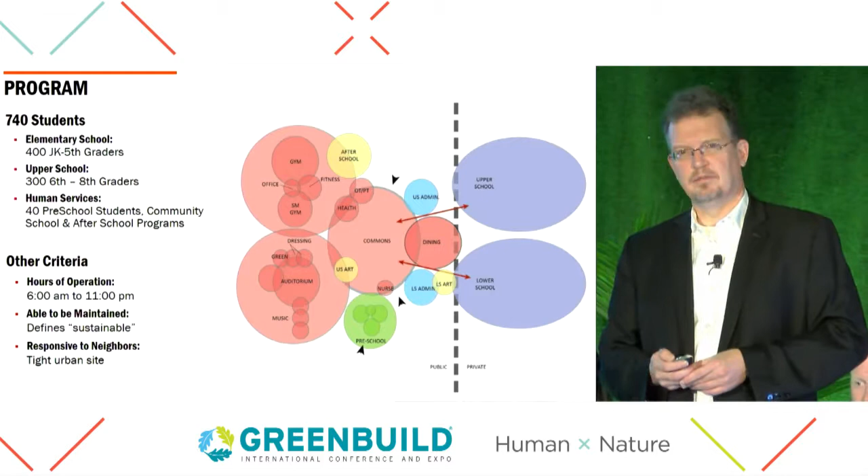And just a little bit on this project. It's in Cambridge, Massachusetts, and it's actually 3 schools on one very tiny site. So there's a preschool, an elementary school and a middle school. They call them lower and upper schools. But it's also a community school in every sense of the word, so it operates throughout the day from 6 a.m. late into the night at 11 p.m. So a very actively used community resource. So I'm starting to demonstrate the power of the place, but also giving us the opportunity to explore all these disparate issues.

It also allowed us, because it was a new building, to explore the performance of the existing buildings that these schools had occupied prior to moving into the new building. Not going to go into great detail, but because we had an elementary school and a middle school, they were in different buildings before they consolidated onto the new campus. So you can see the architecture: one's from the 70s, one's from the 30s, so different in several manners, but we'll talk a little bit about their performance.

But again, the new building had many goals, but one of them, of course, is this idea of high-performance school design. And the greatest demonstration of that, I think, is the photo on the right, in many ways, where the environment is radically different than you saw in those older buildings, perhaps, and some of the best day-lit classrooms that we've done to date. But the other factor here as well, again, is this idea of community.

So, certainly the school is drawing the community in, with their children, but it also is used after hours by the community, but also recognizing that community has another factor, that we're trying to foster a professional work environment for the teachers here as well.

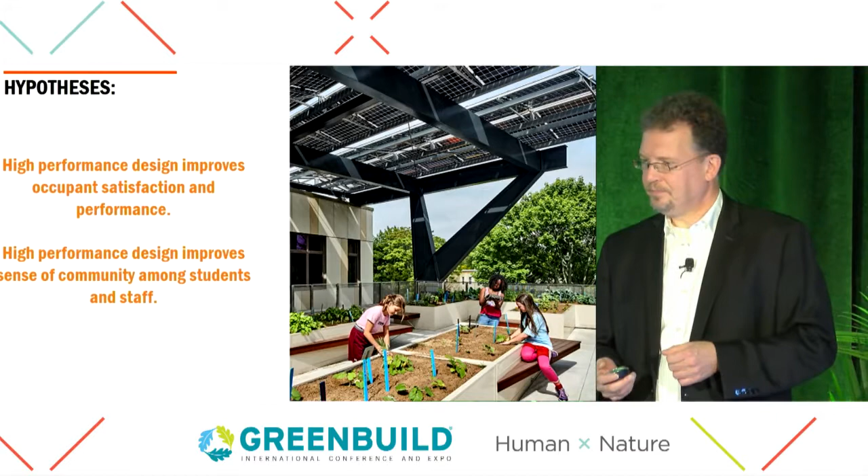So we started to put together a new version of our pre- and post-occupancy evaluation process, partly because we had enhanced our team. Katie had joined us, and some of her colleagues at that point, giving us a greater set of expertise, particularly from the sustainable design side, so we could start to build a process that was both qualitative and quantitative. But we realized that there's a lot to focus on, and so we had to narrow the scope.

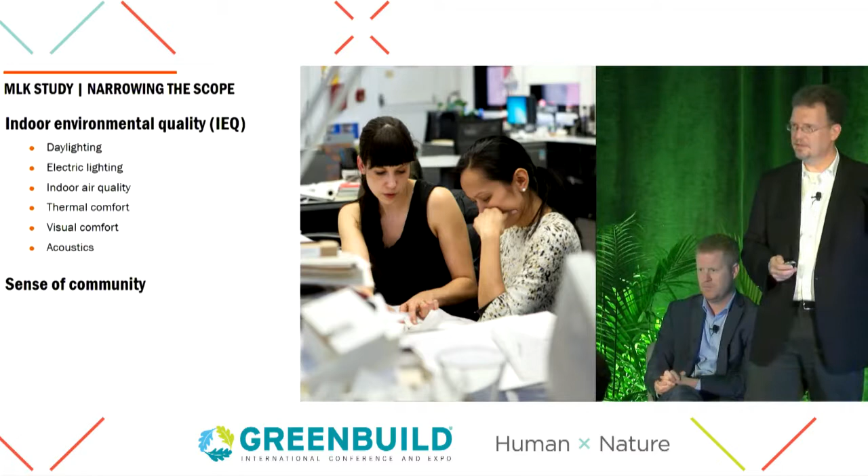And so we started to focus and drill down on this idea of indoor environmental quality, which has a number of facets that we could explore. These were the ones that we defined for this particular study, so everything from daylighting to acoustics.

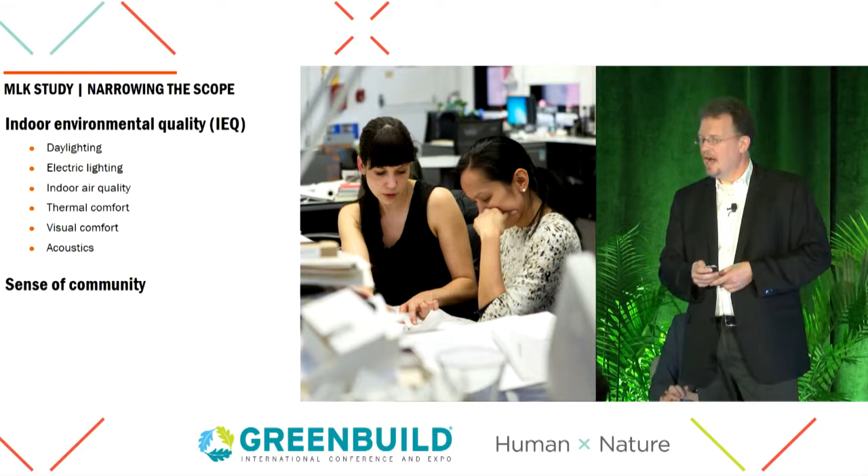But we could also explore that sense of community here as well at a number of different scales, because we could study the individual school's sense of community, we could study how each school cohabitates on the site, and then we could also talk about how the school impacts the community at large.

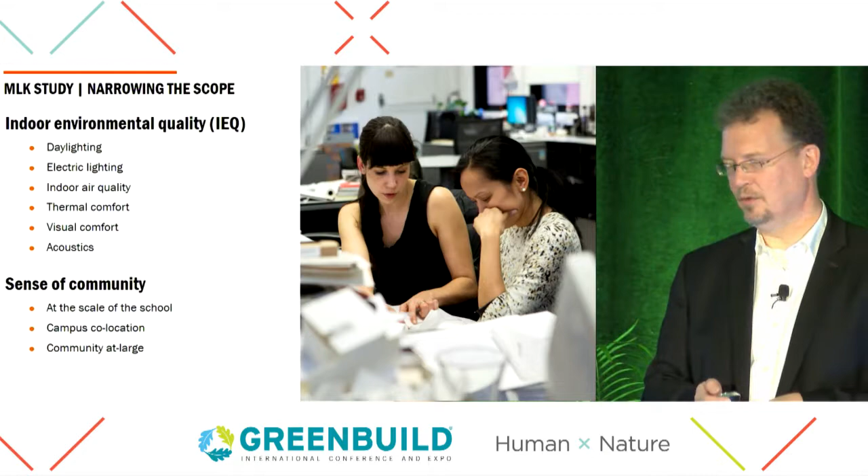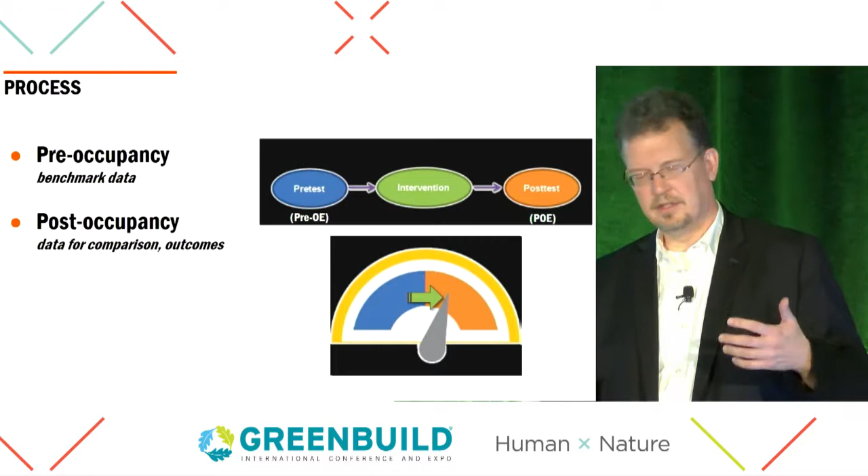And with that, we started to build a process, and I think this is the first time that we did this, the pre-occupancy part. Post-occupancy has been talked about since the 60s, but the important piece is that you need a benchmark, to really see if you've moved the lever right in design. So we studied those prior facilities and how people were engaging with those facilities, and then the new building as well. But of course, we did a literature review.

The two primary inputs for us from the users and the built environment were an occupant survey, which was using SurveyMonkey, so it was online. But we've tried to tailor that, as we'll talk about in a moment, to different people that might be responding to that, and their age, their development, their access to technology.

But the other is that we could get into the environment and start measuring things. So from the IEQ metrics here, and you can see one of our colleagues here actually using some of the tools that we'll talk about in a moment. But the third leg of the stool was this idea of what educational indicators do we need to try and tap into to make this connection. And in many ways, this was the part of this process that we didn't quite get completely done.

But, of course, there's a lot of inputs from the literature review. Many of you probably know these studies, but if you don't, you should check at least these ones out as an input. Certainly the Chan School is doing incredible work on cognition and CO2, and the Clever Classrooms study from the University of Salford is sort of all encompassing on these kinds of impacts. And then everybody probably knows the daylight studies that came out of Heschong Mahone.

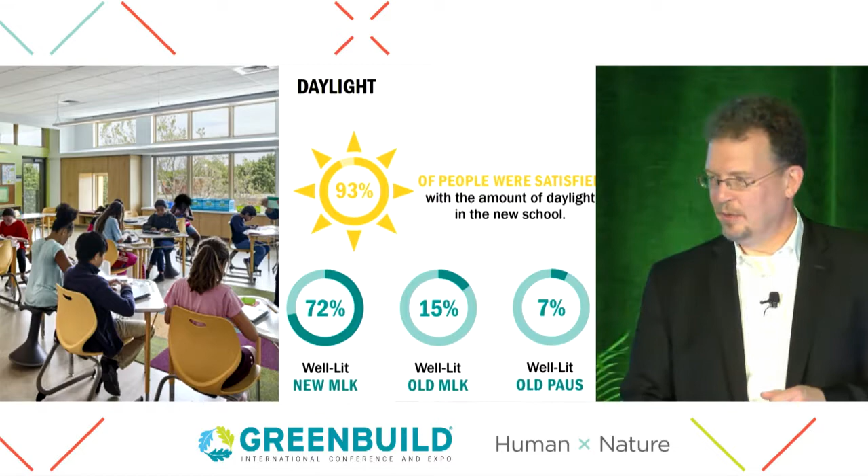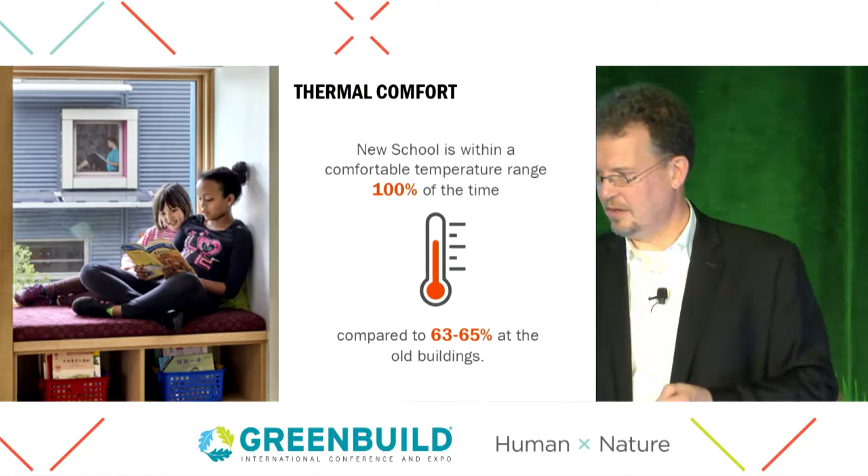So here's what we found in this first process. One, that people were really happy with the daylight in the building. That compares very positively to the older buildings, so old MLK, old PAUS, Putnam Avenue School, as you can see the demonstrated change in people's perception of daylighting in the buildings. Likewise, the buildings performing within the thermal comfort ranges, so again, thinking about how people perceive that.

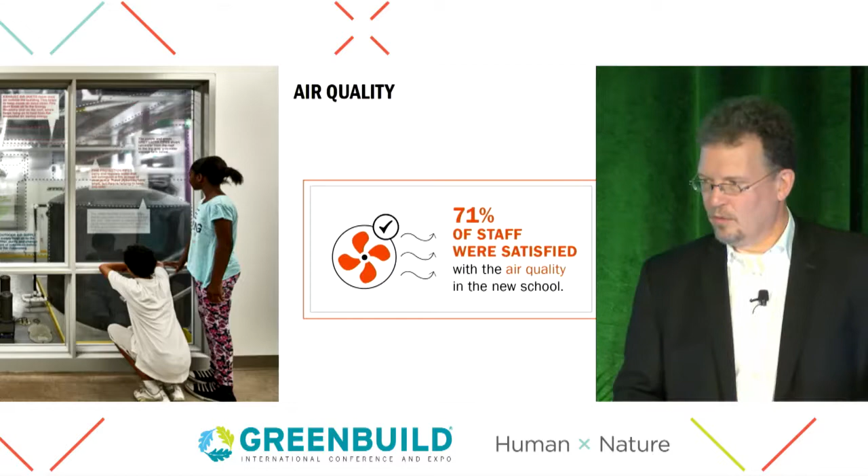And of course, one of the major inputs is acoustics in the environment. So again, another significant return and improvement from the prior facilities here. We'll talk more about acoustics in a moment as we continue to learn about the importance of this in the environment. But air quality and the general outcomes as to the feedback that we received, that, not quite universally, and

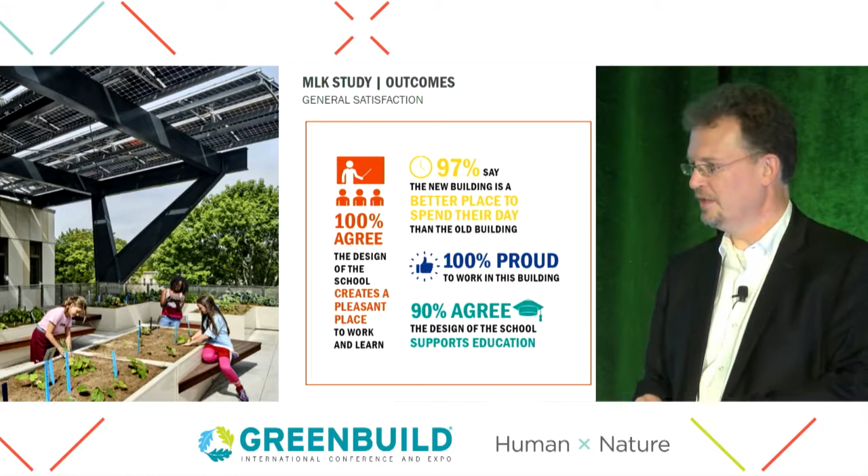my client said, I don't understand why this isn't all 100%. There's a serious case of building envy about this building across the district at this point, and everybody wants to teach in it. I think the lesson there is that probably not everybody's happy all the time, but I think it's seen as sort of a resounding positive impact, and relationship between people's perception of the environment and the design and the inputs. But with that, we continue to push this process forward, and Patrick will tell us how we've been able to do that.

So before we dig into the DC study, I want to give a quick snapshot of what the DC school system looks like and the modernization program that we have undertaken. I think when people hear DC today, you think about Fox News and CNN, but there's a lot of people that actually live in DC, and there's a lot of really beautiful kids that go to school in DC. We have 110 public schools in the district. There's about the same number of charter schools that fall under a different organizational structure, but what I oversee, there's 110 schools.

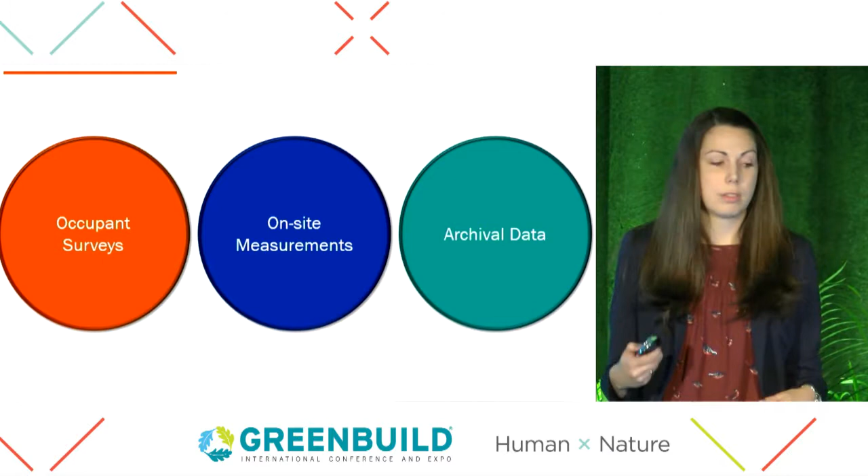So to talk about each of those pieces in a little more detail, first the surveys. The really interesting part of this process was the schools we were looking at were elementary and middle schools, so we needed to adjust our survey templates a little bit to work for those populations. For our middle school students and our older elementary students, we used some pictures in our questions to make sure they were understanding what was being asked of them. The teachers had a significantly longer survey that looked at some more factors around their school and asked more in-depth questions. So we got a little more information from that population.

And then my very favorite population was our kindergarten to 2nd grade students. We wanted to include them as well and get their opinions. So we created a 1-page worksheet that the students could fill out where they could pick one IEQ factor, tell us if it made them happy, unhappy, ready to learn, not ready to learn, healthy or unhealthy, and tell us why in 1 sentence, and then draw us a lovely picture of what they thought of their classroom and their IEQ factors. So these were my favorite results to process by far.

Next, we went into the on-site measurement portion. So we have a variety of tools at our disposal that we use to measure these IEQ factors, and I'll introduce a couple of them a little bit later for an activity we're going to do. But you can see us here using them on-site.

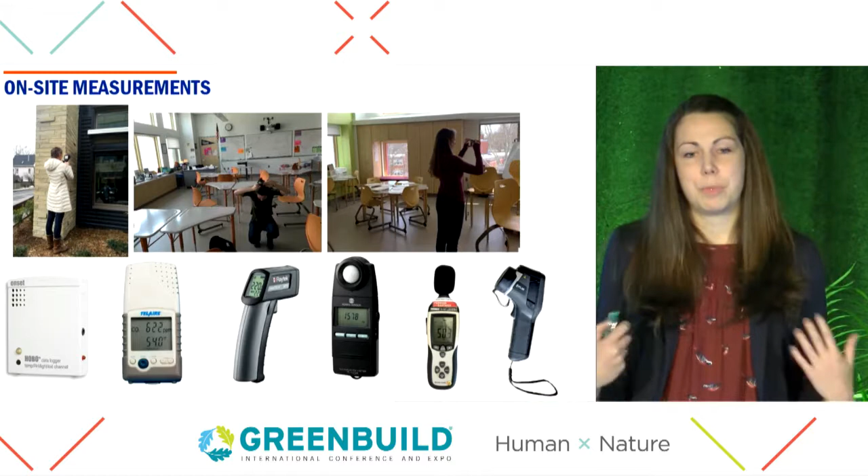We did this study over about a 5-week period last winter. So we went to 2 or 3 schools a week with a team of volunteers who were taking the measurements on-site. And then we did the daylight measurements over spring break so that we could be in the classrooms but not disruptive of the learning that was occurring.

So the measurements that we actually took came into the 4 categories of IEQ. First being daylight. We looked at both distribution throughout the space, what areas were overlit, what areas were underlit, and which areas were appropriately lit. And then also looked at glare within the space as well.

Moving on to thermal comfort, we looked at the air temperature and humidity. We did this over a period of a week so that we could observe both occupied and unoccupied conditions as well. And then we also did thermal imaging of the exterior of the building so that we could see where we were having issues with thermal bridging and heat loss on the envelope.

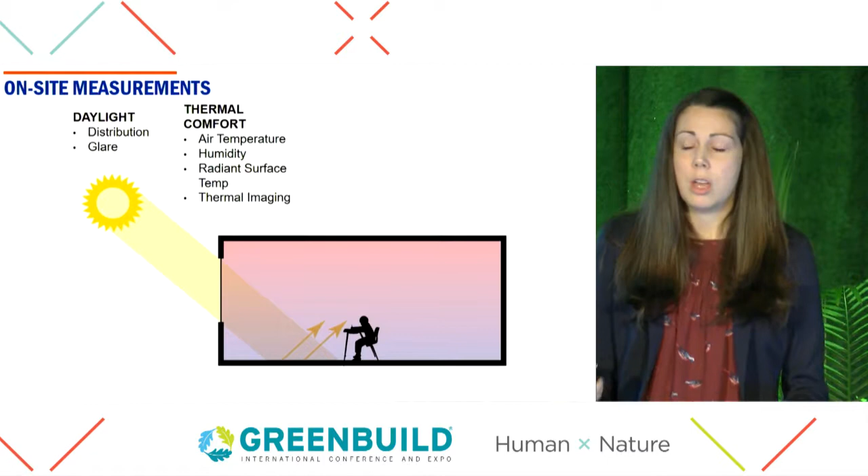Then moving on to acoustics, we looked at ambient noise within the space as well. We did this both again in the occupied and unoccupied conditions so that we could see what the background baseline level was just from the mechanical systems or noise from the street that was coming into the facility, and also when there were students in the classroom and they were doing activities, how loud it got during those conditions as well.

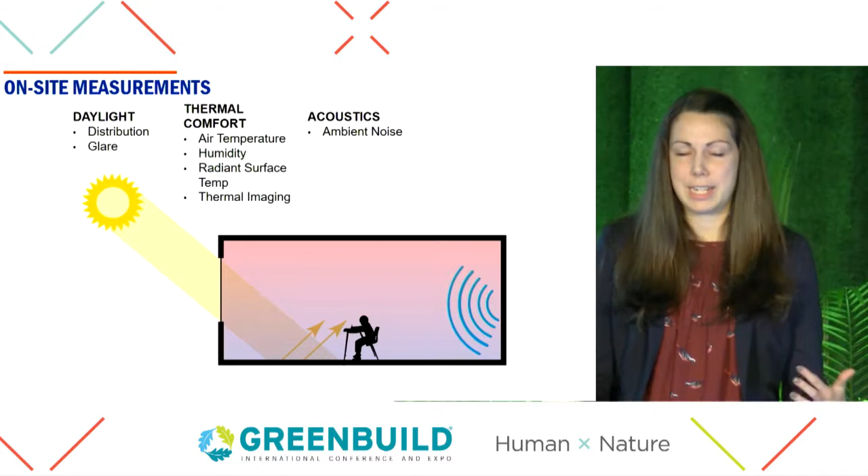And then finally, in air quality, we looked at both CO2 concentrations within the space to see how those would build up throughout the day and how the mechanical demand was keeping up with that, and then also VOCs within the space as well.

And then for archival data, using the metrics we were able to get from DCPS and other publicly available sources, we looked at student attendance rates within the school, boundary rates, which is actually a metric fairly specific to DC, so students are able to attend any DC public school they'd like to, but they do have a neighborhood school that's assigned to them, which is the closest school to their house.

So this metric is looking at the number of students who choose that neighborhood school as the school that they actually attend. So that was contrasted also with enrollment rates, just looking at how many students are attending that school. Also student nurse visits throughout the year, faculty retention, and crime incidents in the block surrounding the school.

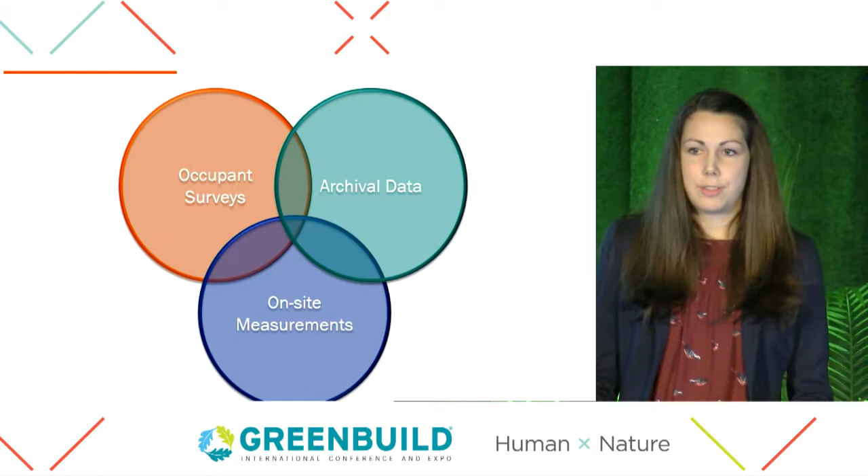But really what we were interested in doing was looking at how all of these pieces of data came together. So we actually brought a statistician onto our team to help us look at all of this data and try to identify the connections and what was causing these different issues. So we're going to get into the results of that study, but we're going to keep you in suspense for a little bit longer. We'll get to that a little later.

But for right now, we're going to move into a quick activity and demonstrate this whole process right here in this room. So we're going to use you guys as our guinea pigs of a POE of this room. All right, so the first one we're going to do, if everyone can take out their cell phone, you can actually use your cell phone. So we have, let's see, okay.

So what we're going to ask you to do is, how have you found the acoustics to be in this room? So what you're going to do is you're going to text one of these codes, for which one you identify with, to the number 22333. We'll be able to see. We hope. Well, that's good. Yeah.

Interesting. For folks who are dissatisfied, can you raise your hand? I want to see where you were in the room. But in general, it seems like the acoustics seem pretty good in here, and they seem good up here.

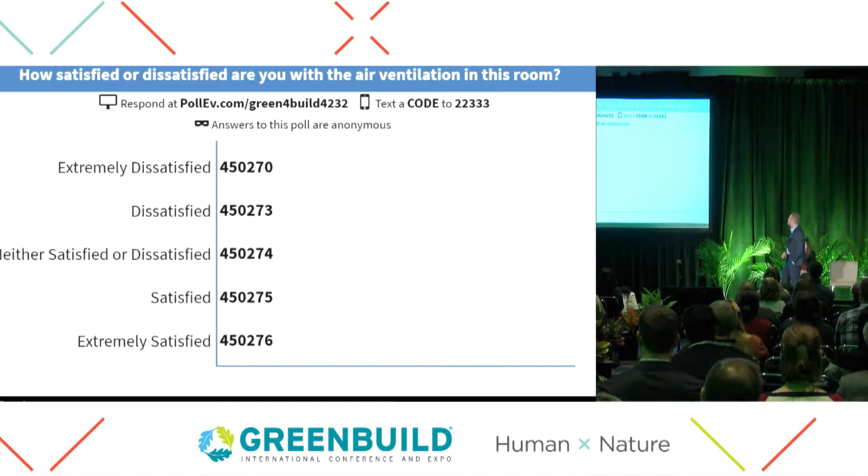So the next one we want you to think about is air ventilation. How do you feel in the room? Do you feel there's enough circulation of air? So again, text the codes on the left on the chart here to the same number.

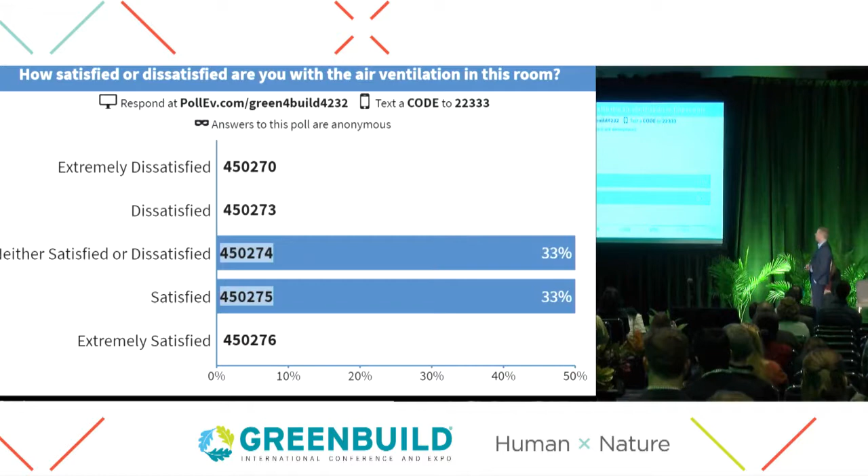Not quite as good as the acoustics. No one's ever extremely dissatisfied. Yeah, right. Or extremely satisfied here. Not an extreme group. Yeah. Very neutral. All right.

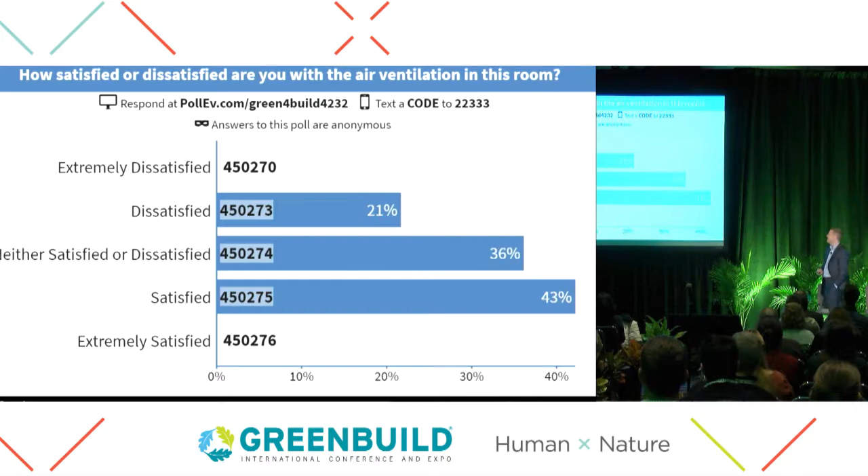So the next one you want to think about is temperature. It's obviously cold outside, and I was telling Sean and Katie, I hate winter conferences. You got to lug around your winter jacket too, but I would agree with the dissatisfied. These lights are intense.

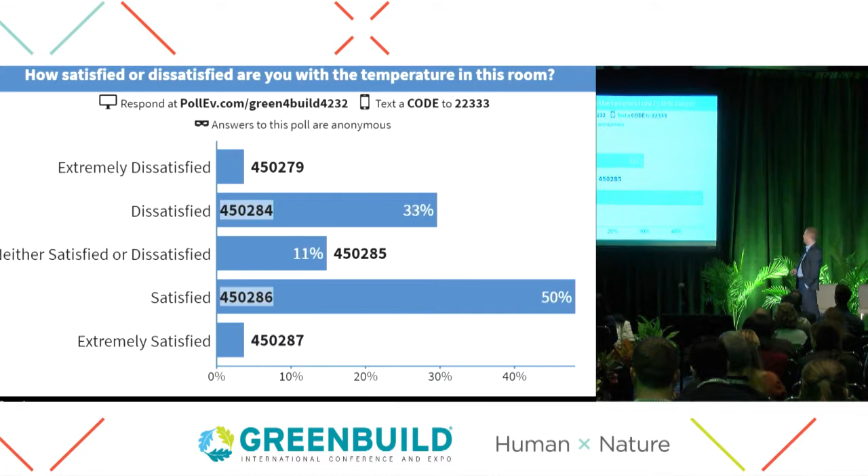Interesting. Definitely more of a distribution here. So this is just an example of what we put the students and the staff through. Obviously, a lot more detailed questions than what we're doing here, but this is an example of how everyone's a little different, especially in this temperature one, and everyone's got different body temperatures and what feels good. So interesting results.

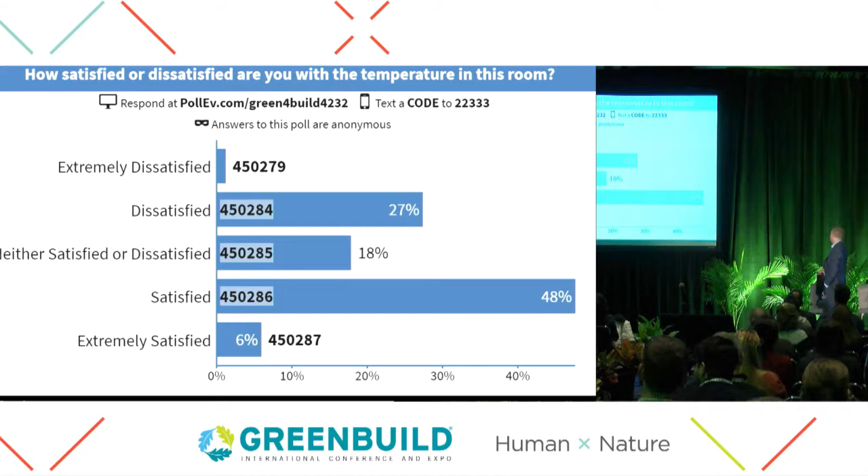All right. So we'll move on to our IEQ metric actual on-site measurements. I have been collecting measurements the whole time. You guys had no idea. So this is my sound meter. It's been sitting up here up front the whole time. So we will actually get a reading of how the acoustics are doing within this space. We always have to explain this one when we take it to schools or offices. It's not actually recording what you're saying. It's just recording how loud you're saying it.

So it will log data over time. I have it set right now to take a data point every 45 seconds. So I'm going to get my lovely colleagues to download this data real fast, and at the very end, we'll be able to see how the acoustics actually performed in this space.

And then my other tool that we've been using is a Hobo CO2 monitor. So it's collecting temperature, humidity, and CO2 concentrations and has been logging every 5 minutes while we've been in this room as well. So we'll download this data real fast, and we will see how this room is actually performing and be able to compare that with your guys' satisfaction. And then our last piece, Sean.

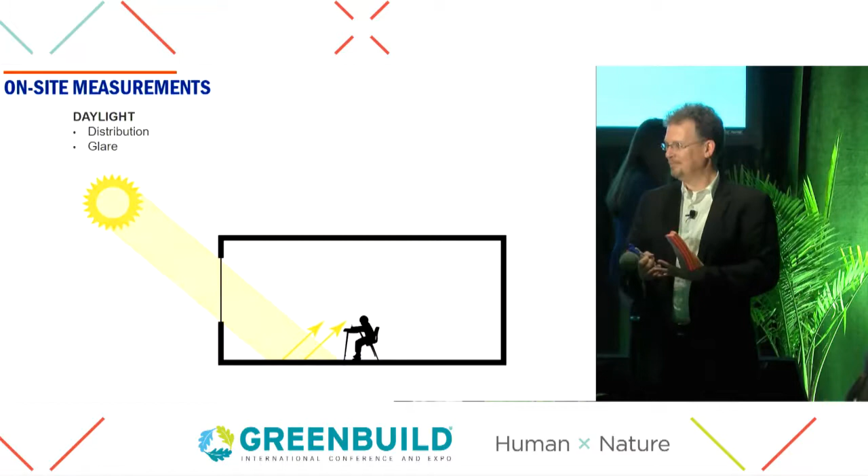So the final piece, and I think the most fun piece, of course, is the drawing exercise. Well, okay. So you saw the example that the children did before. What I'd like for you to do, and as many of you are architects, hopefully you'll be interested in drawing for us. But those that are interested, raise your hand, and what I'd like to do is just take 2 minutes and do a sketch on one of these indoor environmental quality factors, so acoustics, thermal comfort, daylight, whatever you like, and just do a quick sketch, stick it on the wall if you like.

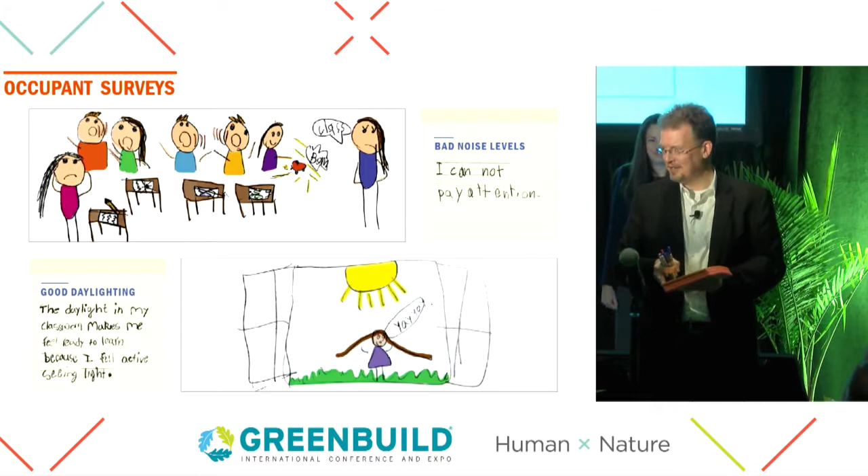We can actually make a gallery here amongst the fronds, and again, we'll have the opportunity to compete with some of the kindergarten students here. There's a marker here if you like as well. So, anybody else? Come on, there's got to be more. So, go for it. Take some. Got the hot pink ones. So, pass them down. Anybody? You want to take one and pass them down. And just 2 markers there if you want. Thank you. Anybody else?

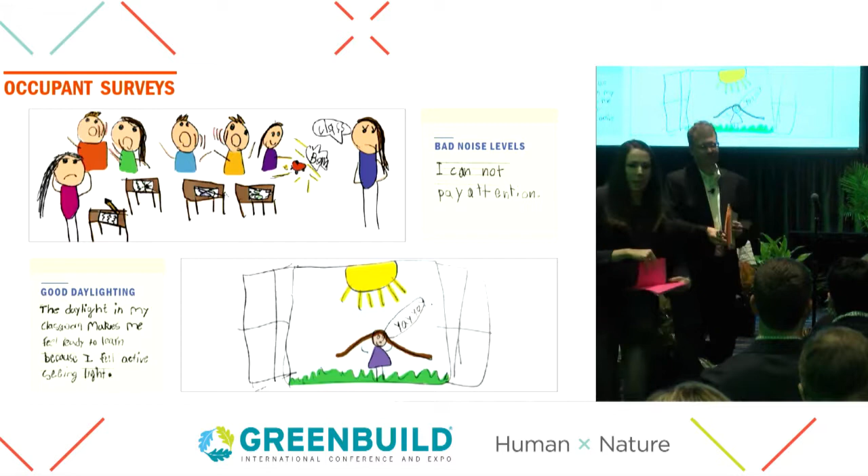Just watch it. These are Sharpies. They'll bleed through on whatever you're writing on, probably. Good. Take one, pass. Would you like one? No? Okay. You have a marker. All right. Back of the room, people. Come. Anybody else? Anybody?

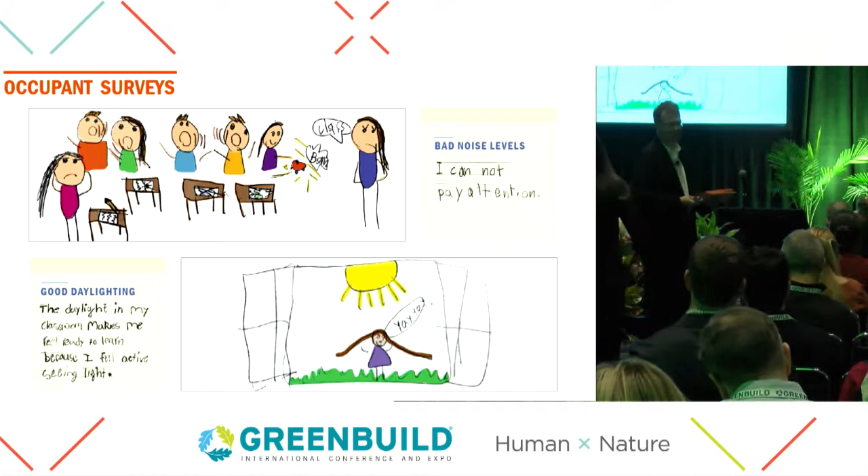No? I make teachers do this all the time. The kids are always very eager to do it, but it's always very interesting, and teachers quite often draw very similar diagrams to students.

So, you got one? You need a marker? Red's not going to work for you on the pink, probably. So, all right. Great. So just take a minute or two, sketch it out. We can actually collect them and maybe just stick them up on the wall if that makes it easy for you. You guys are good? Question? Marker? Okay. They're right there. All right. Who said that? Who needs it? Okay.

Yeah, please draw whatever you like, and it doesn't have to be beautiful, but what we're doing is evaluating the existing conditions right now. So again, we're looking for a variety of different feedback points into the evaluation. So, great, thank you for putting that up. So this is your competition.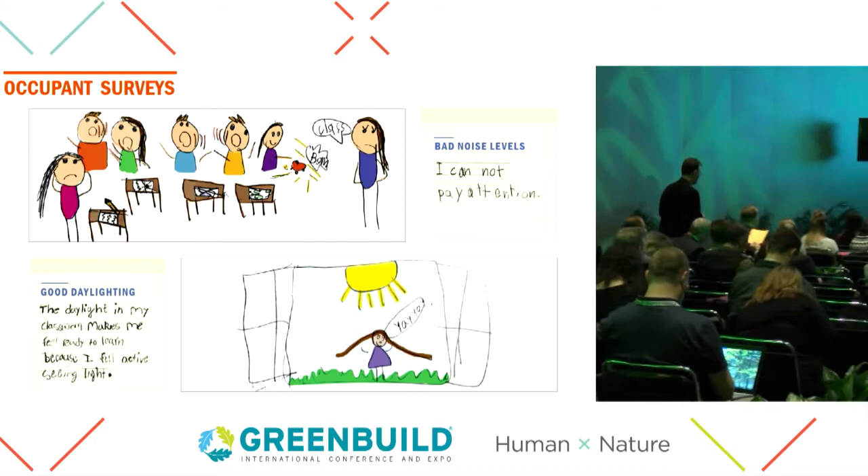If anybody's done, I'd be glad to stick them on the wall here. The technology won't allow us to broadcast it. Maybe we can collect them afterwards, but if we put them up on sort of a gallery, everybody can take a look at some of the feedback as well. Awesome, thank you. Can you just write, sorry, what's the factor that you're evaluating on there too?

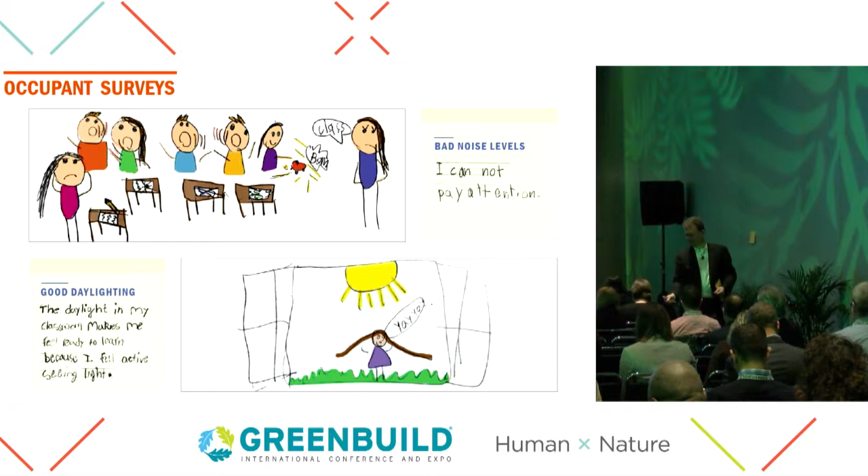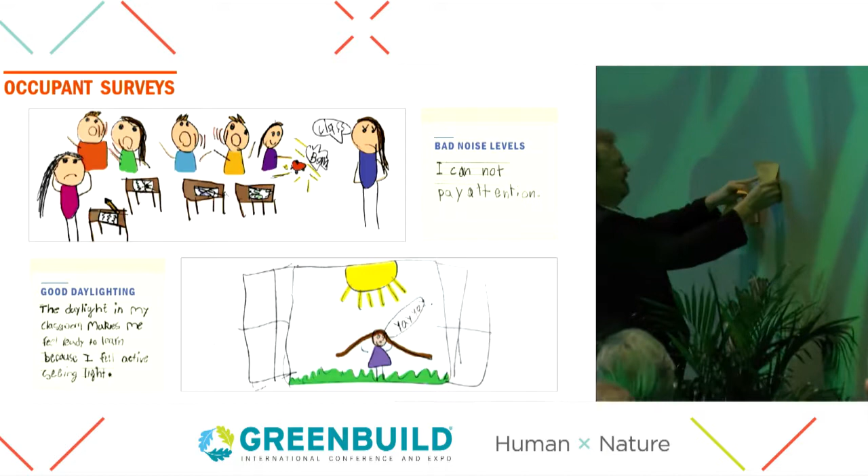Ready? All right, great, thank you. That's an interesting comment. Any others? Yeah. Thanks. You'll help my bottom line at the end of the year if I can collect the markers back. Okay. That's a good one. Thank you. All right. Interesting. We got some sort of new ones here.

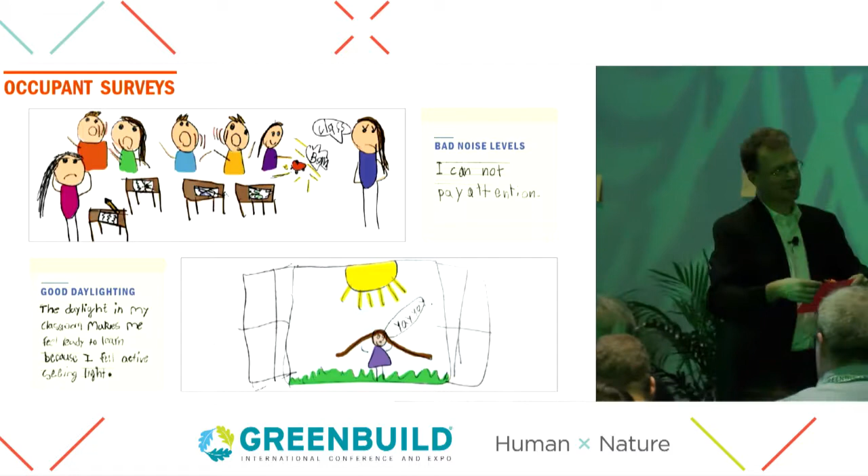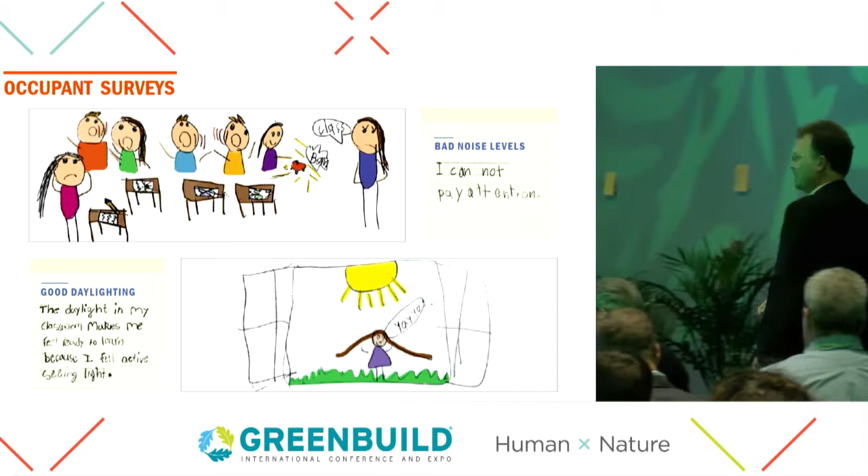So daylighting, this one's about the screen being too bright. This one's about happy plants, but laser beams in your eyes. Yeah, so we haven't heard some of these comments before. Air availability, is that a positive or a negative? It looks kind of tense. Yeah, so any others? I'll come back that side. All right. Do you have what you need? So let me just do a quick survey of this side.

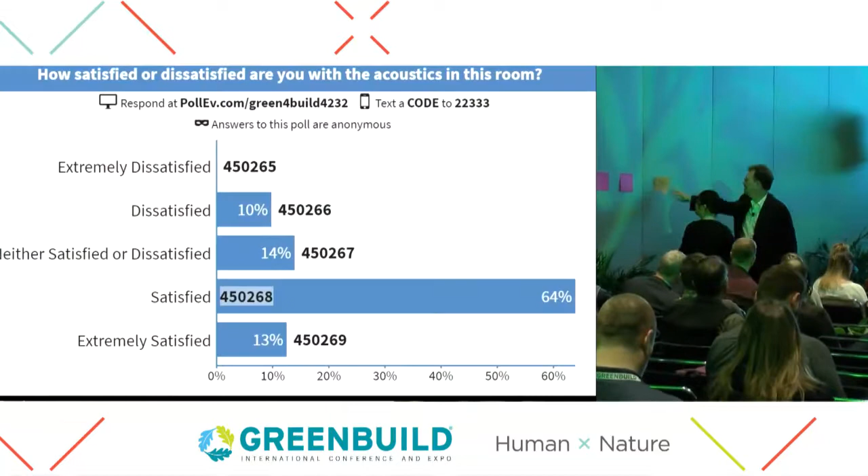So this one says the AC is working, but the door is kept open, keeps the room unbalanced. Daylight, so people are sleeping in the diagram. So artificial light, sleepiness, so there's a consistency on the lack of daylight. Acoustics and plants, both good, yay. Daylighting, so there's broad consensus here. Dark and sleepy, airflow and daylighting associated. My head is cold, the chair's comfy. The heat in the room makes me feel sleepy.

So there seems to be certainly a consensus on the daylight, but also some of the air quality issues. Acoustics, is that a good one? People are smiling, right? So we'll take that as a good sign. No daylight, again, so reinforcing the idea that daylight's a key factor missing in this environment. Especially at 8 a.m. Yeah, you'll note I didn't bring the daylight meter for this one, so I figured that wasn't a good activity. All right. Awesome. Well, we will come back to the live data a little bit later, but now to go back to our actual study and get you the results of that.

So overall, we had very, very positive results, but just looking at the differences between the modernized and non-modernized surveys, students were 25% more proud to go to school in a modernized building, and they were happier, calmer, and more ready to learn. So all those things we were hoping to find, we did find improved satisfaction in those modernized schools. In addition, looking at the IEQ specifically from a satisfaction standpoint, both students and faculty reported increased satisfaction across the board on each of those IEQ metrics. So the perceptions were significantly improved in the new facilities.

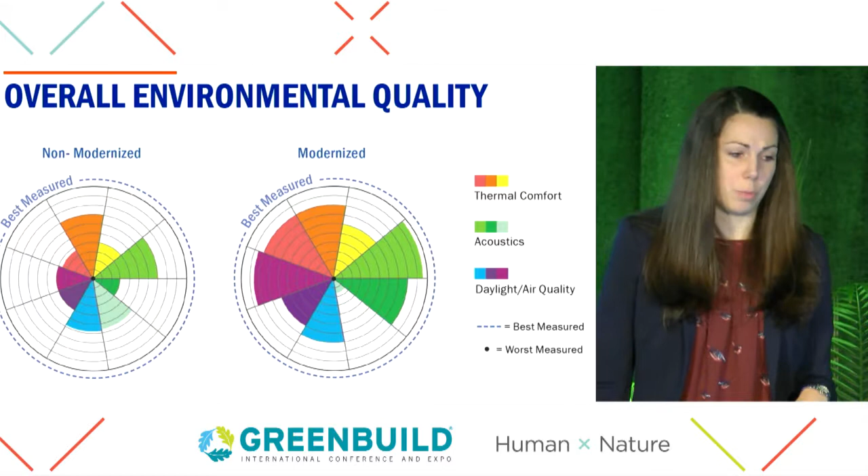But to look at those in a little bit more detail, daylight particularly, we saw 47% higher faculty satisfaction in modernized buildings, and that also correlated with our on-site measurements. We found about 10% more well-lit area within the new schools. This was a little bit interesting since all the schools we were looking at were modernizations of existing facilities. So you're a little bit limited in what you were doing. We weren't really adding windows to most of these facilities. We were working with what we had, but there was some shading added. There were light shelves added in some of the schools. So there was some difference in that.

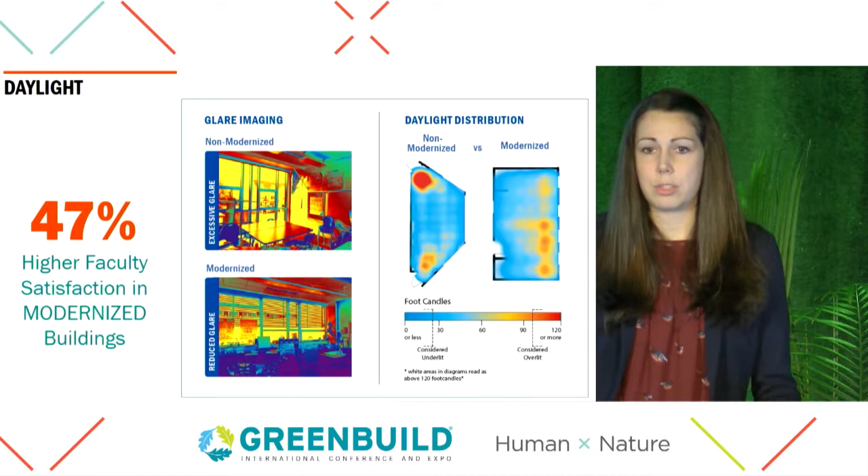But overall, we found daylight to be one of the most influential factors, and it was most highly rated around satisfaction across the board for all of us. So we know daylight is important in schools, but it really is perceived by both the students and the staff in those facilities.

Moving on to acoustics, we found that the ambient noise levels in modernized schools were 11% lower than they were in the non-modernized schools, and that also correlated to an improvement in satisfaction within those facilities. We did find acoustics to be interesting. While there were improvements in these modernized schools, across the board, all of the schools performed pretty poorly around acoustics, which we found to be particularly interesting because, as Patrick mentioned, in DC, all the public schools are required to get LEED Gold. So they're all meeting the acoustics minimum prerequisite, at least. If they also went for the credit, they were probably doing additional measures. But across the board, satisfaction and performance around acoustics was very low. So that's something that we've noted as architects we need to continue to work on and improve.

And I know that Patrick and the district have noticed as well that it's something they want to start focusing on in their future modernizations. Yeah, I'll be honest. I mean, I personally don't care what the ambient noise is. It really matters when kids and students and staff are in the classrooms. And if we're not doing enough in an occupied setting, like Katie said, it just means we need to rethink and sort of evaluate what other measures we can do in these classrooms, because if no one's in the room, it doesn't really matter, honestly.

So we need to think about what additional measures. We already do a ton in the ceilings, obviously, to meet the ambient noise, and so we need to sort of lean on the architecture world to think a little outside the box about how we improve the acoustics in an occupied setting, especially in a school where you get 25 loud 8-year-olds. It's a tough challenge, but it's really important for us.

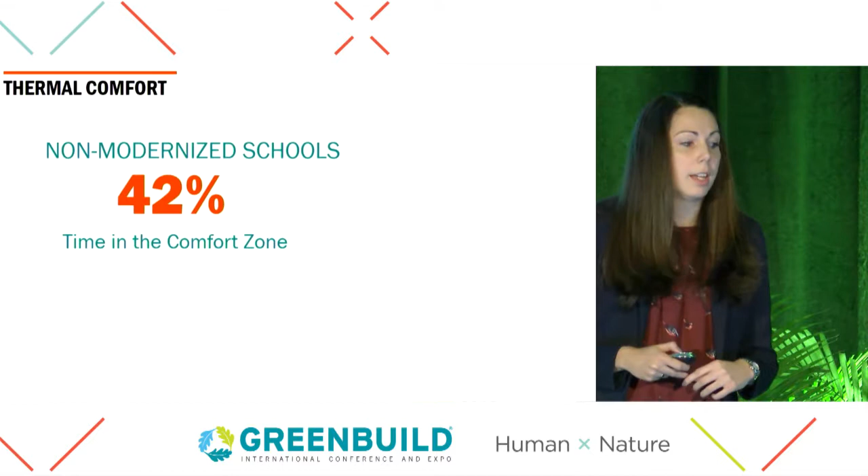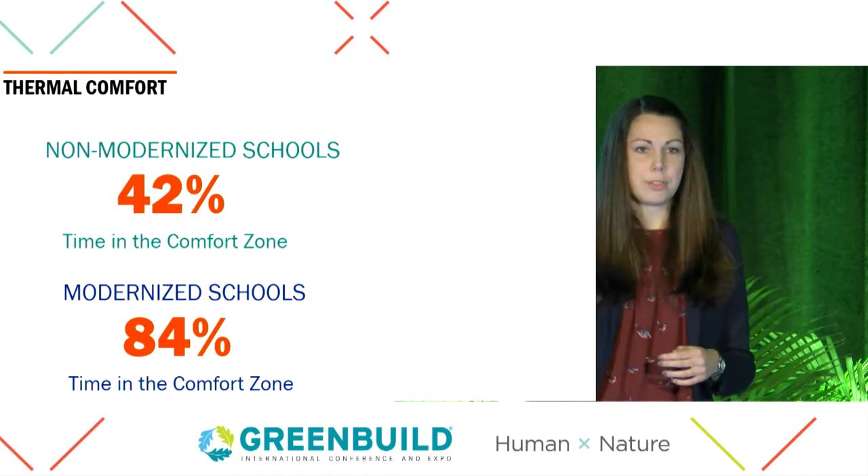And then moving on to thermal comfort. Again, the non-modernized schools were in the comfort zone only 42% of the time, while our modernized schools were in the comfort zone 84% of the time. And again, some of the measurements we got in those non-modernized schools were pretty startling. We got schools that were getting up to 85 degrees pretty regularly and down into the 50s in the same facility. So there were definitely some issues in those non-modernized schools and much better performance in the modernized schools.

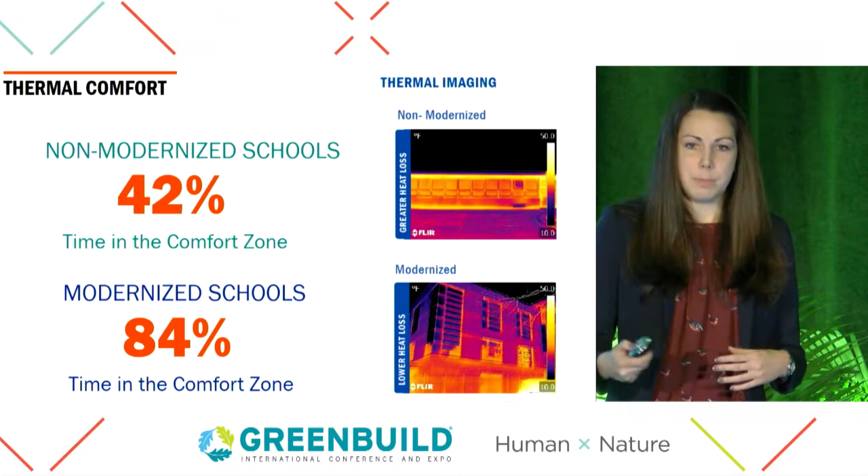And also looking at the thermal images as well, we saw improvements in the modernized facilities, which was great to see, especially since they are renovation projects. So again, there are only some things you can do, but even improving the windows and making those small changes did make a difference in the thermal imaging as well.

And then looking at our archival data, the modernized schools outperformed the non-modernized schools around student attendance, boundary rate, enrollment, school nurse visits, and faculty retention rates. So all of those great data points that Patrick needs to take to the mayor, we did find improvements in those modernized facilities compared to the non-modernized.

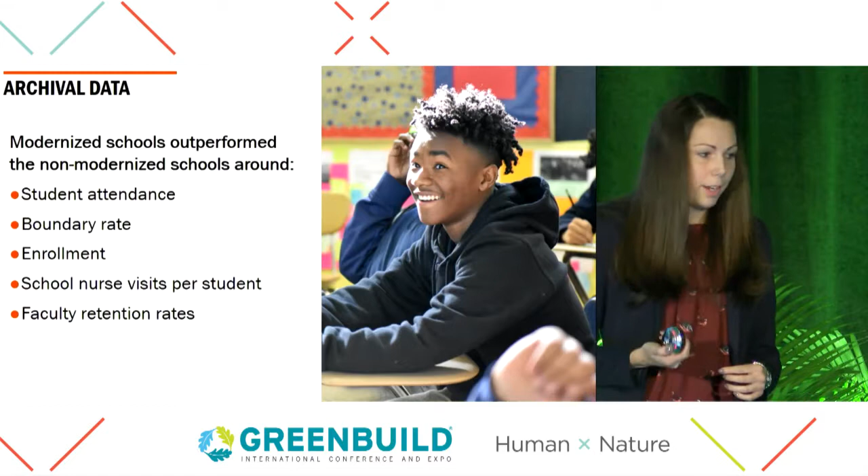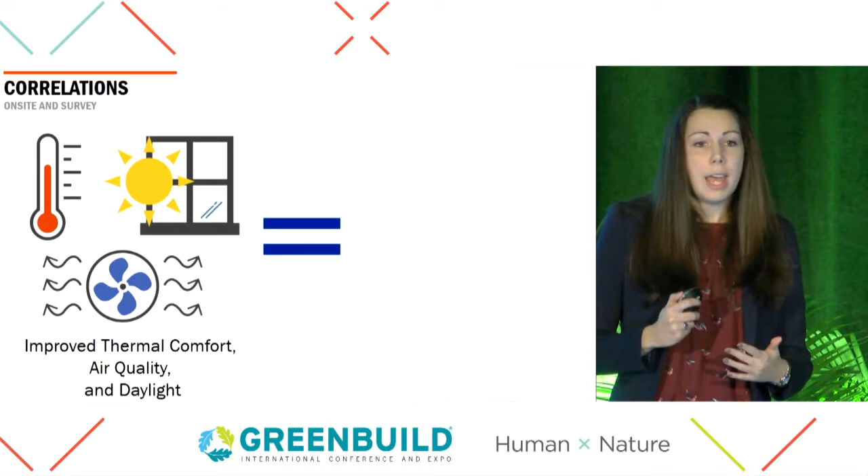But the part that I find the most interesting is when we started looking at the correlations between all of these different data points. So we did find between the on-site measurements, schools that had better thermal comfort, air quality, and daylight also had higher faculty satisfaction rates. So again, really making those connections between the things that we know inherently are important, but they really do correlate to that improved satisfaction.

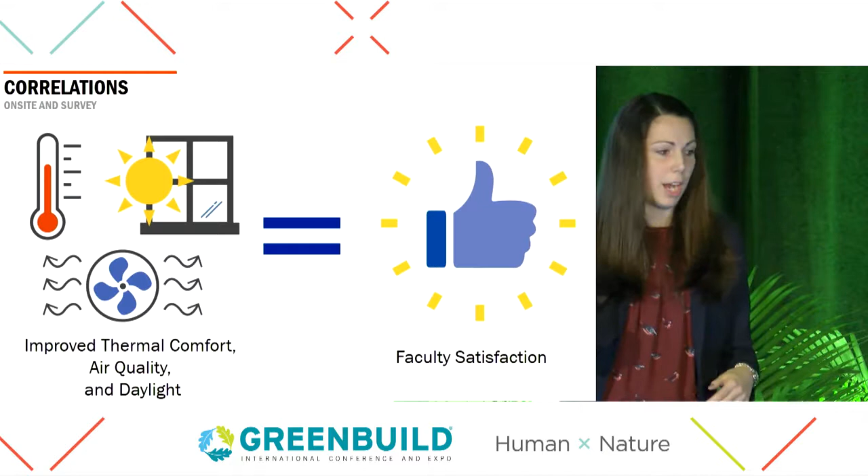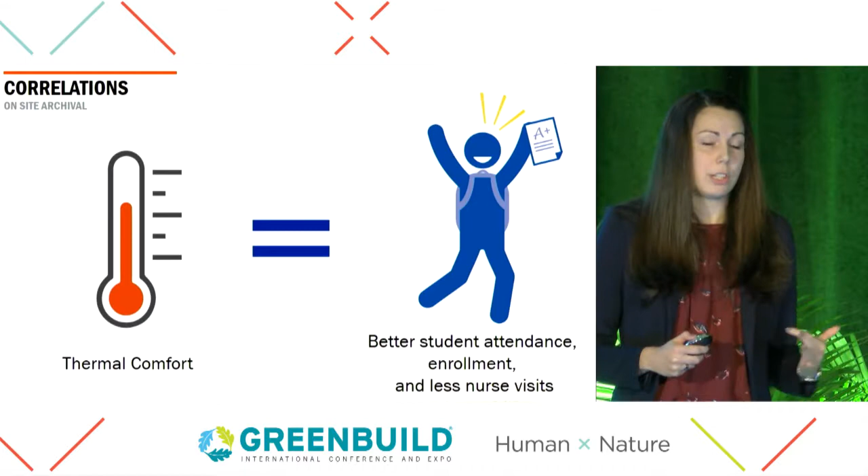Also, schools that had better performance around thermal comfort had better student attendance, enrollment, and fewer nurse visits. So this is one of the things we were really trying to do in this study, start to tie those IEQ factors directly to those student performance indicators, and we were really glad to see some of these connections occurring.

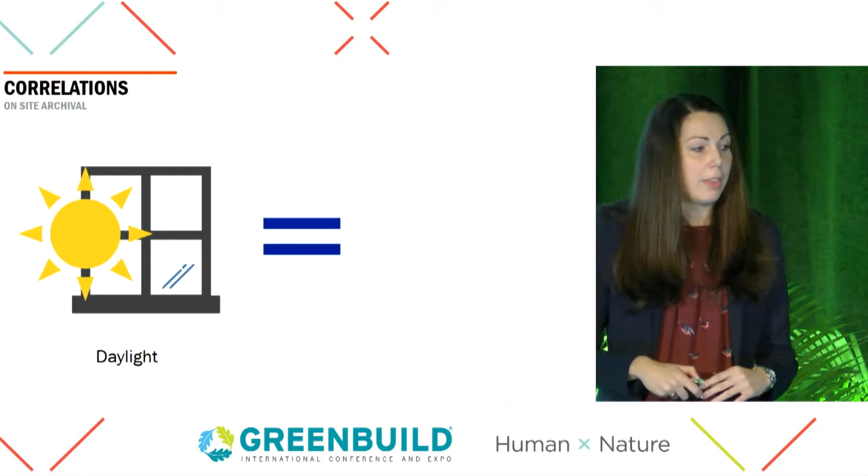And then also looking at daylight, schools that performed better around daylight had an improved boundary rate and higher enrollment rates, which was great to see, and also had less crime around the school, which was one that we found very interesting. I would hypothesize that's related to daylighting also having better views to the outdoors, so maybe there are more eyes on the street in these facilities that have better daylight, so another side benefit of those strategies as well.

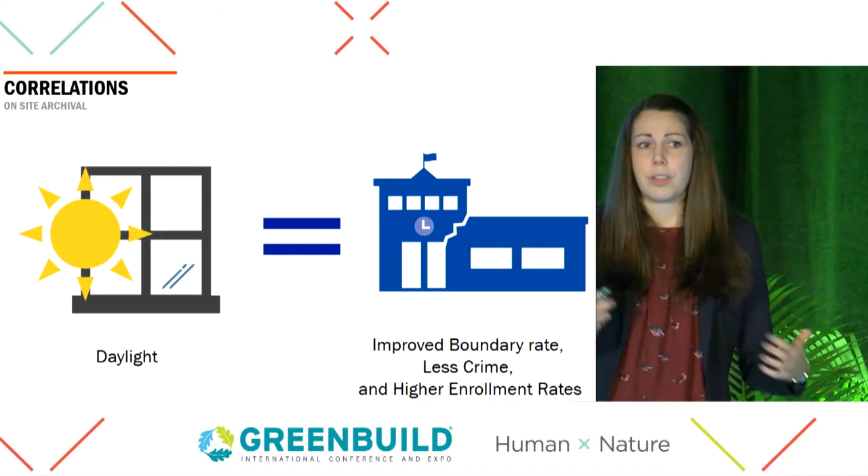But one of the things we really were hoping to find was a connection between schools that were modernized and those school performance indicators. And we found for a couple reasons we weren't able to do that with this study. Number one, we were only looking at 9 schools within the 110 in DC Public Schools' portfolio, so we know our scope was a little bit limited to start to make those assumptions. But the other big thing was that some of these schools had just opened the year prior, so the students hadn't been in these facilities very long.

It takes a little bit longer to start to see those metrics change. So we hope to go back in 5 or 10 years and be able to see if there's really a difference after these modernizations. So that's something we hope to follow up on in a future study to look at in a little more detail.

So our high-level conclusions from this study: we found that there are significant improvements in modernized schools. It's definitely a worthwhile thing to do, so we were happy to support that hypothesis. Another big takeaway was that note around acoustics. It's something that we want to start looking at, trying to identify what the source of that issue was.

Is it that the background noise is too high? Is it that when it's occupied, the noise is an issue? And start to see what we can do about those specific issues. And then around daylight, it was great to see high levels of satisfaction with that. So we want to continue to see how we can improve those factors as well.

And then finally, we realized we needed more time around those school performance indicators. So that's something we want to follow up with additional studies in the future. So we're each going to take a little moment to talk about our next steps. It's different for each of us based on our roles. So we want to tell you what we hope to do in our next moves.

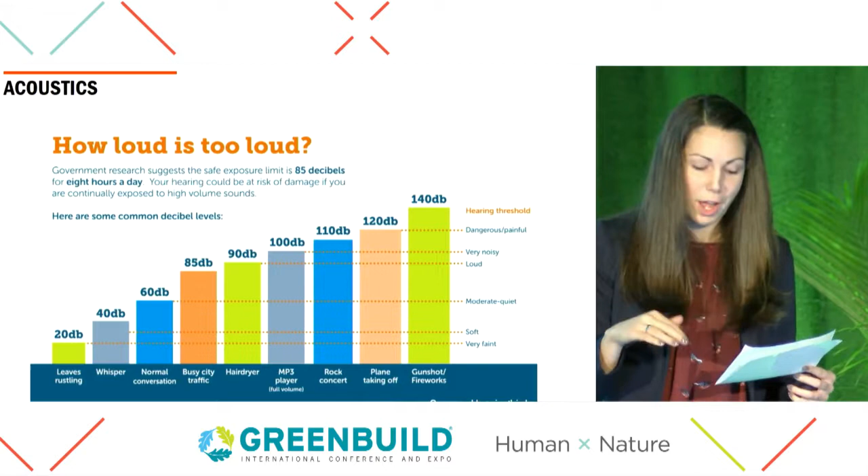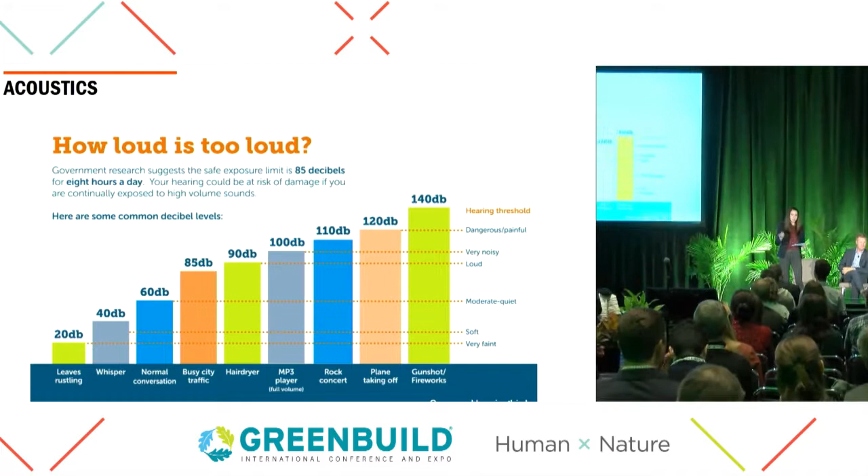So real fast to give us the results of our POE in this room. So we'll start with acoustics. So here's just some industry benchmarks of how loud it is at certain decibel levels to give you a range. So our average in this room was 57 decibels, so a pretty good number down there at the moderate to quiet zone. And the max we got to was 73. So good work, sound team. We didn't blow out anybody's ears in the room. We did a pretty good job here. And that correlates pretty well with those satisfaction numbers we saw in the survey. So good to see.

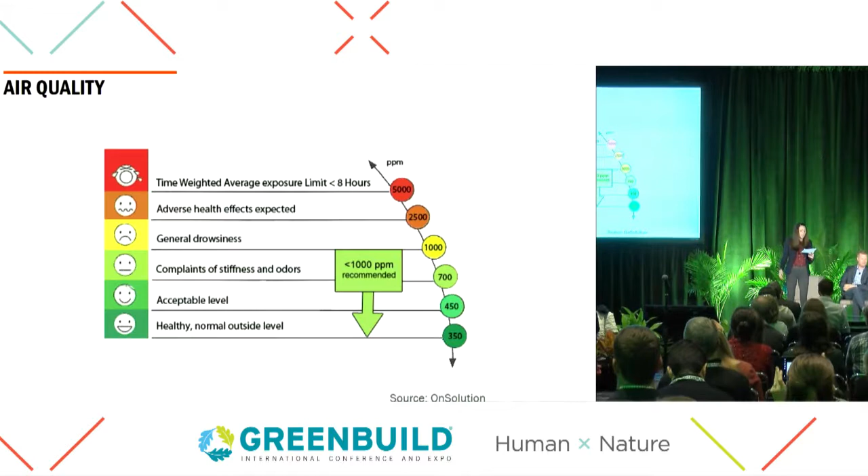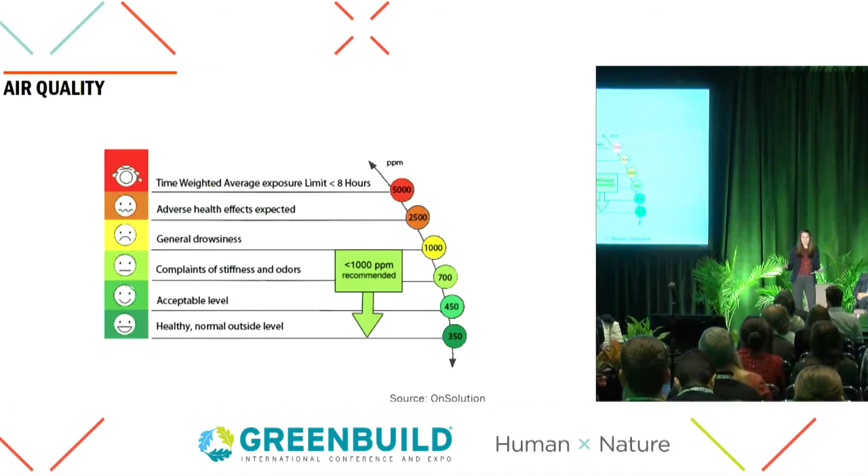Moving on to air quality. So looking here at the parts per million of CO2 concentration in the space. Here our average was 835 parts per million. So we're doing pretty good. We're starting to get into that complaints of odors and general drowsiness. But the max we got to today was 924. So if you were sleepy, it's just because you stayed out too long last night. It's not because of the room. You can't blame it. Sorry, guys.

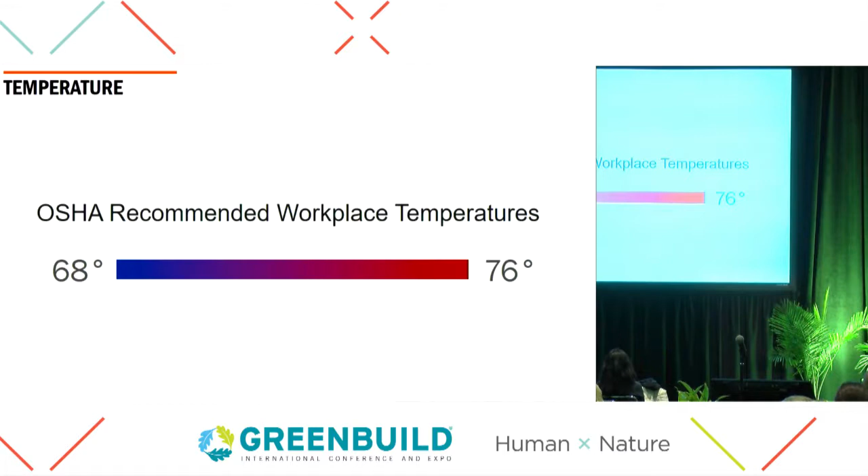And then for temperature, so we got up to 74 degrees. So we were getting close to that max recommended temperature, but our average was around 73 degrees. So on the warm side, we started to see some dissatisfaction with that, but it does fall within the OSHA recommended workplace temperature range. So that's what we found today.